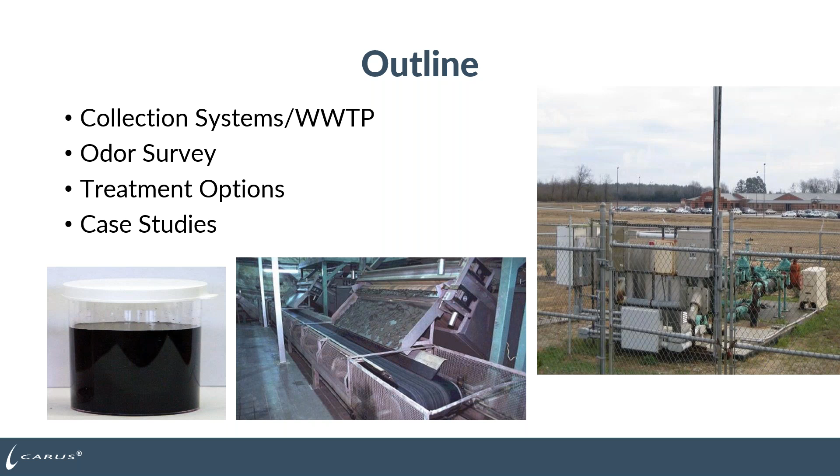So to go over a brief outline of what we're going to cover today, we're going to cover odor control with permanganate. We're going to start out in the collection systems where the wastewater starts, and then move in toward the plant itself, and then to the headworks, and then into the plant in solids dewatering. We'll talk about odor surveys. We'll talk about the many different treatment options that you might have, and then we'll have case studies for each of these different applications.

So one of the big things is, what is odor, right? How is it formed in your system, both out in the collection system, at the headworks at the plant, in the dewatering process itself? What are the reasons that you would treat for it? It could be as simple as meeting the OSHA regulation for hydrogen sulfide. It could be customer complaints or odor complaints from people near the plant or near that sanitary sewer. And then what are different things you can do in your treatment plant, but we'll focus on permanganate itself, specifically on how it can remove odor compounds like hydrogen sulfide and mercaptan.

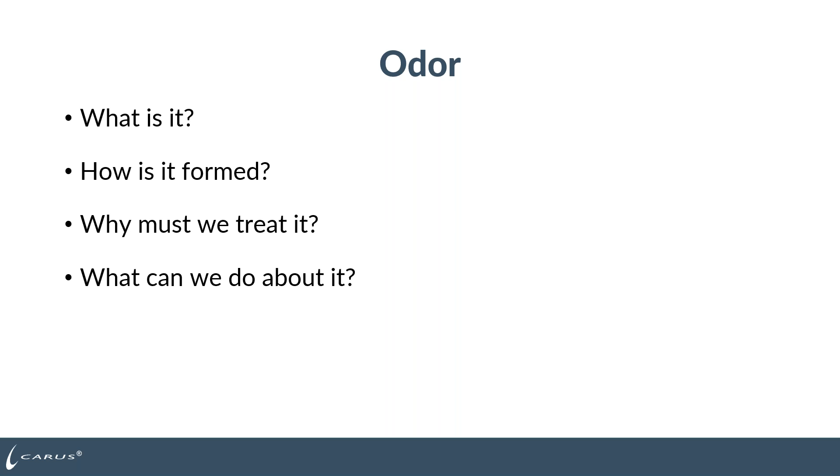So wastewater systems are very complex, lots and lots of different parts, lots of different pieces moving the wastewater from a person's home to your wastewater plant. So you can generate odor throughout that process. So out in the collection systems, you have pump stations / lift stations collecting wastewater before it pumps it downstream through a force main. You can have gravity sewer discharges where you can have odor complaints as well. So those are all places you're collecting the wastewater from homes or from businesses or from schools, and you have a chance to collect and concentrate the odor at those places.

It moves through the collection system, obviously downstream towards your wastewater treatment plant, and you have your headworks at the wastewater treatment plant where you do screening and grit removal where you might have some odor control issues. You then have your clarification processes, your sludge settling in your plant, and then typically, depending on the size of the plant, you might do dewatering with a belt press or a centrifuge to dewater to have biosolids that you're either going to go out and do land application with, or you're going to send to the landfill as waste.

Throughout this process, probably the biggest thing that most people associate with wastewater generally is nuisance odors. So both hydrogen sulfide and mercaptans can cause rotten egg odors or different types of odors out there in the system. And typically those are the things that people are going to notice. So they'll smell that rotten egg odor, they'll smell the funky mercaptan smell, and they'll call in to complain.

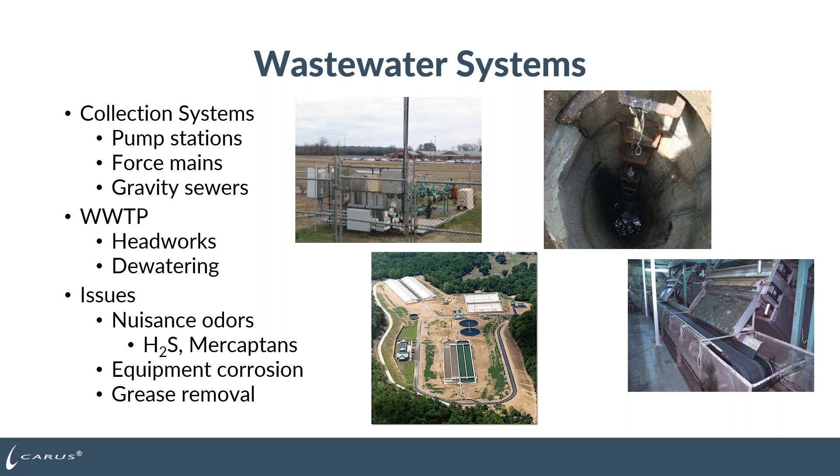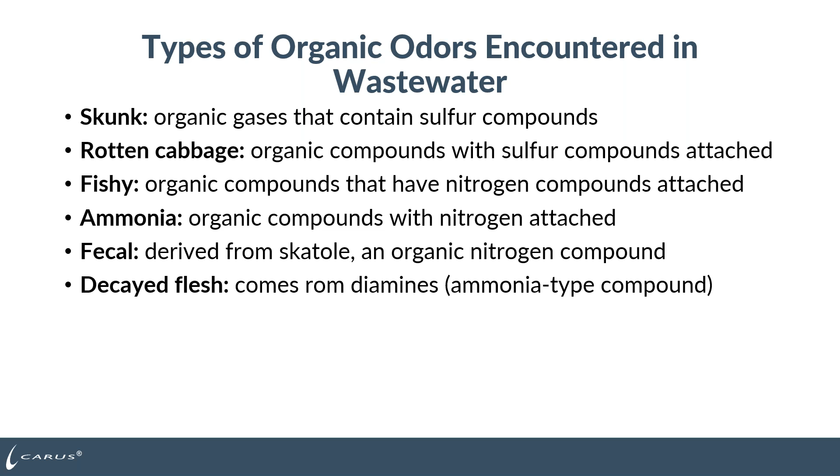Now, tons and tons of different odors in wastewater. Depends on what kind of compounds are going. Typically for municipal wastewater, it's usually hydrogen sulfide, rotten eggs, which we'll talk about. But if you have other kinds of discharges, so industrial discharges or food industry, just any kind of industry in general that can discharge other types of organics to the system, you might have some different odors. So you could have something like skunk, rotten cabbage, fishy. Depending on what's going on, you might have ammonia. You might have fecal, decayed flesh. So all different types of odor compounds are out there. But typically there's some that filter to the top.

A lot of the other compounds you hear, you'll do special testing. So maybe you have rotten egg, but maybe you have a different specific odor. So you can do some odor testing and determine, is it a mercaptan? Different mercaptans have very different smells. But there's a whole range of compounds you can have. So if it is a different odor that's not rotten egg, it could be a mercaptan or one of these other organic compounds. The big takeaway here is that odor threshold wise, all these compounds are well below part per million, in the part per billion level, where you can actually smell them.

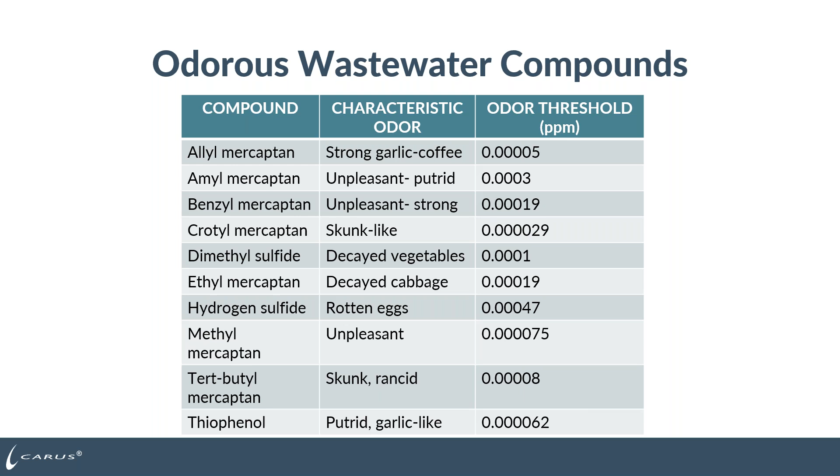So like I said, those are some of the weird odors with the mercaptans. Hydrogen sulfide is probably the biggest one. And then depending on what's going into the process, you might generate some ammonia at the treatment plant or out in the collection system. Along with those gases, you could have carbon monoxide or carbon dioxide, or in a processing or treatment plant where you're breaking down biosolids, you could generate some methane. So sometimes when you go by a wastewater plant, you'll see them flaring off the methane with a flare. You'll see the same thing sometimes at landfills, where they're generating methane gas from the breakdown of the products in a landfill, and they'll have the methane flare. And then the common other things we have in the atmosphere, oxygen, nitrogen, and hydrogen.

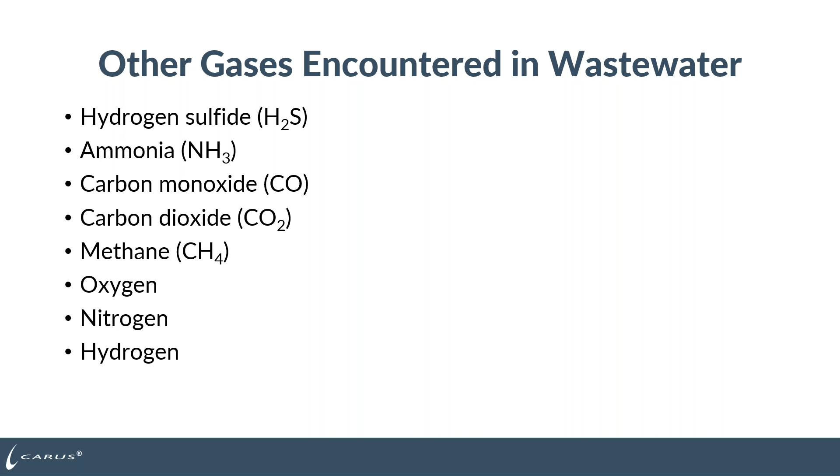The big one though, probably by far the most common at most places causing the odor complaints, is going to be hydrogen sulfide. It's a colorless gas, so you don't see it in air. It has a very distinctive rotten egg odor. The issue with the rotten egg odor is as you stay in an environment with hydrogen sulfide, it deadens your sense of smell. So initially when you walk into an area or start to smell the rotten egg odor, you'll be able to smell it directly. It'll be pretty repugnant at that point in time.

The longer you stay in that environment, it starts to deaden your sense of smell and you don't smell it anymore. So you think the odor has gone away when truly it hasn't. And that can be dangerous because you don't know that you're still in that environment. The other part as well is that hydrogen sulfide can get in your hair, on your clothes, on your equipment, and when you leave the area, as your sense of smell comes back, you'll notice the hydrogen sulfide as it comes off your clothes and your equipment.

So you'll notice that you're stinky when you leave the site as your sense of smell comes back. Hydrogen sulfide is also water soluble. So a portion will be soluble in the water, and then the portion that strips out will become atmospheric hydrogen sulfide. It's extremely toxic. You're going to see the OSHA chart for it here in a slide for how dangerous it can be in the environment. It's one of the things that you would measure for confined space entry as well.

And then on top of that, at different levels, it can be corrosive. So it mixes with atmosphere and moisture to form sulfuric acid, which can corrode metal, concrete, just all sorts of equipment. You'll see some pictures of that as well. And then depending on the concentration, if it gets high enough, it can actually get into the explosive range.

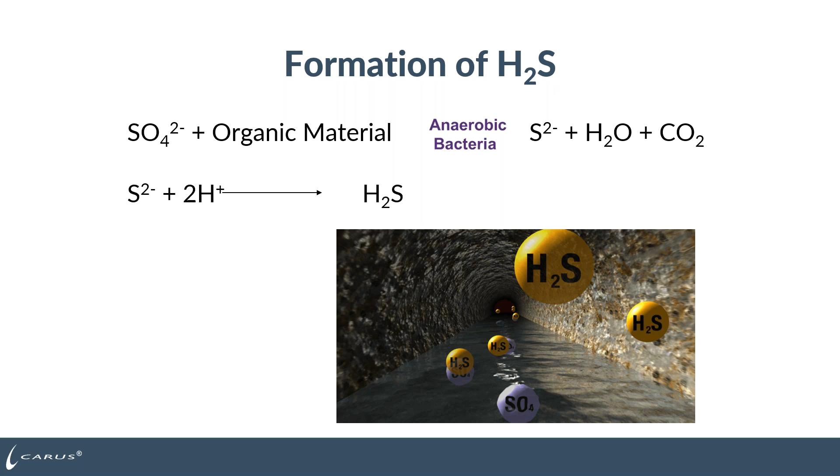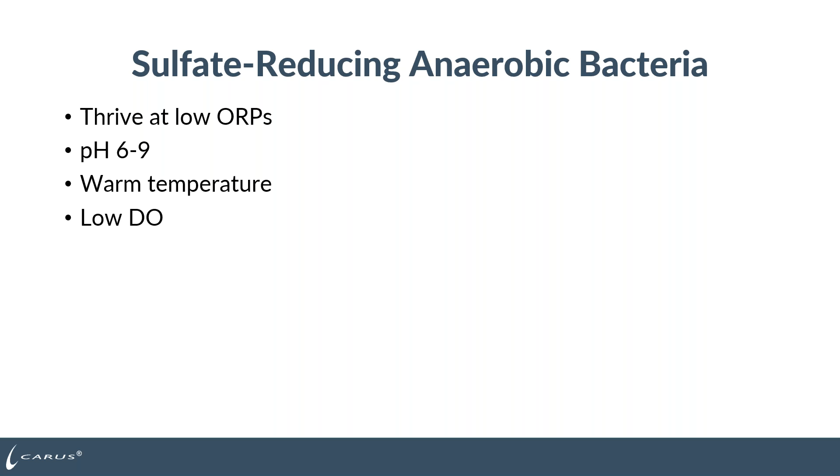Everything's there for those sulfate-reducing anaerobic bacteria out in your collection system and then into your plant. They thrive at low oxidation reduction potentials. Most wastewater is pH 6 to 9, so they've got a perfect environment. Wastewater is typically warmer than the outside atmosphere here in the cold north, although now we're warming up, so temperature is always going to be warm. And then if there's no dissolved oxygen, the anaerobic bacteria predominate in that case and will generate a lot of hydrogen sulfide.

So what does that look like out in the collection system? In this case, you've got a gravity sewer here. So you've got the pipe wall, you've got some bacteria growing a slime layer on the inside of the pipe itself. You've got the wastewater passing through the pipe. If there is sufficient oxygen, so you have a high dissolved oxygen level in the wastewater, greater than 1 milligram per liter, typically then you won't have much dissolved sulfide in the wastewater. The bacteria that are going to predominate are going to be aerobic, they're going to chew up the oxygen, and they're not going to generate anything else.

What ends up happening, though, is as that dissolved oxygen level drops, because as the bacteria pull the dissolved oxygen out of the wastewater, those bacteria are going to start to look for oxygen in other sources. So once they run out of dissolved oxygen, they're going to start chewing up on the sulfate that's in the wastewater itself. Sulfate's always in excess out there in the wastewater, so they'll chew the oxygen off of it, and they'll generate dissolved sulfide into solution. So now you start to increase the level of dissolved sulfide in the wastewater itself. And then as that sulfide level builds, it's in equilibrium in the water itself and the atmosphere above it. So some of it's going to start to slowly come out of solution.

Now, there are ways to pick that up. If you shake it or cause turbulence with that wastewater, so it falls into a pit, you're pumping it, so you're aerating it somehow, you're going to strip more of that dissolved sulfide out of solution and force it into the atmosphere. Once it gets into the atmosphere, it can mix with moisture to form sulfuric acid. And as that sulfide forms sulfuric acid, it corrodes everything it comes in contact with, so metal, concrete. It hits the pipe wall, goes down the pipe wall, back into solution, and now you end up back at sulfate again, and then the cycle starts over and just kind of keeps repeating itself time and time again.

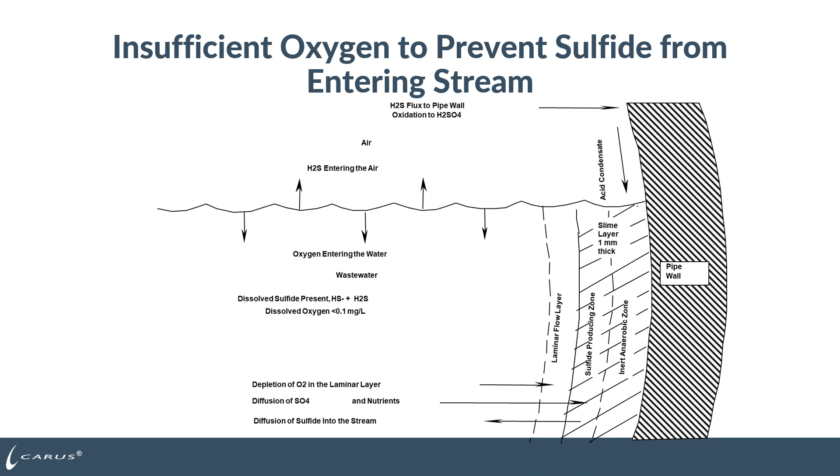So you can trap it, but you're not treating to remove it. It's still there. It can come back out of solution as the pH drops. So generally, if you do something like lime or magnesium hydroxide, that can keep the pH up for a while, but as it combines with more wastewater at different lift stations and different junction points, and the pH drops back down, that hydrogen sulfide is going to come back out of solution. So you're not, in that case, treating to remove, you're treating to kind of trap it in solution.

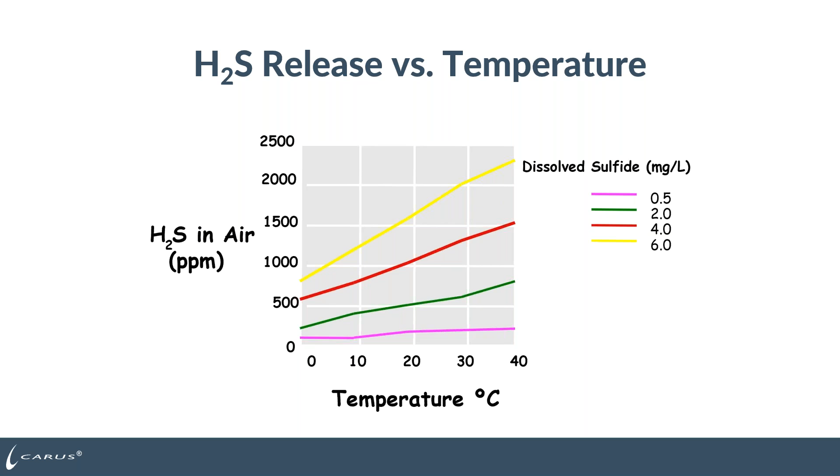So one of the ways to remove hydrogen sulfide: you have the dissolved sulfide in solution, permanganate is going to oxidize it, and it's going to oxidize it very, very rapidly in wastewater, whether it's at an acidic pH, so below 7, neutral pH at 7, or a basic pH where we're slightly higher up in the 8s and 9s. The one thing you'll notice is as the pH increases, the amount of permanganate that you need does increase. Generally in wastewater, we're right around that pH 6 to 7 to 8. So we'll be right there toward the neutral level, where it's about 4 parts of permanganate that you need for 1 part of hydrogen sulfide.

One of the benefits of permanganate is its reaction rate. So permanganate is going to react with hydrogen sulfide pretty much instantaneously. So you add it to the wastewater. A lot of times we can do jar testing with it. Measure dissolved sulfide, add permanganate, stir for 30 seconds, measure dissolved sulfide, and show that all the dissolved sulfide is gone.

You can also use another oxidizer like hydrogen peroxide. Hydrogen peroxide typically does need some reaction time, so you might need 20 minutes, 30 minutes in order for the peroxide, which is packaged oxygen, to react and remove the hydrogen sulfide. In the case of iron salts, you're not an oxidizer, you're a precipitation reaction. So you add iron salts to precipitate out iron sulfide. It just depends on how you get contact and get that precipitate to form. But typically, if you're using iron salts, it's going to take slightly longer, up around the 40 to 50 minute mark for that sulfide to drop if you're doing jar testing or applications out in the field.

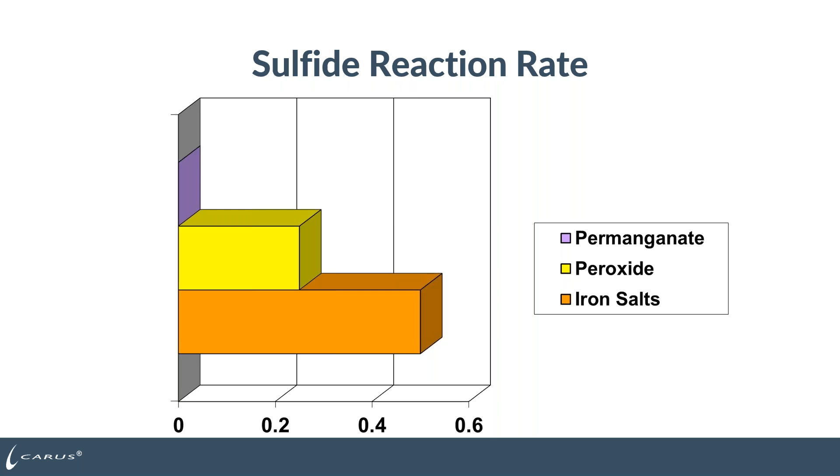Oxidation versus precipitation for mercaptan destruction. So if it's not just hydrogen sulfide, if it's one of those other compounds of mercaptans, there's multiple ways you can treat. Once again, in this case, this was mercaptan concentration up around 35 milligrams per liter or parts per million. Iron salts, because there's an organic molecule attached to the sulfide, you can't really get a great precipitation reaction like you can with dissolved sulfide. So in this case, they were feeding 1,500 parts of iron salts, and they were only getting about a 10 part per million reduction in the mercaptan concentration.

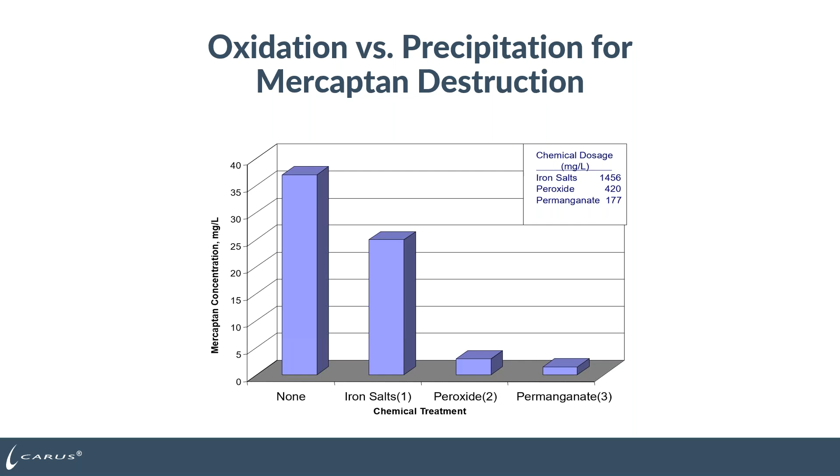Peroxide will work. It will break down the mercaptan odors. They were using 420 parts of peroxide. You can see you go down from 35 down to less than 5, down to about 2. Permanganate, much lower dose, 177 parts. And we can get it down almost to less than 1 or to 0. So we get that reaction rate pretty quickly and much more oxidation of the mercaptan itself at a lower dosage than the peroxide itself. So there's a little bit of the chemistry.

So what are you going to do if you do have odor complaints in your system? So the first thing is to do a wastewater odor survey. So systematically collect information about your wastewater system. And that can be where you're going to treat at. So how many odor complaints do you have in that area? How often or how frequent are those odor complaints? What's the flow rate of the wastewater that's there? What type of odor complaints do you have? Is it just the typical, hey, it smells like wastewater, rotten eggs?

Do some monitoring as well. So what are the levels of complaints that you're getting? So obviously, hey, maybe we get a half dozen complaints from people in the area. So we go out and do some monitoring. And then the question is, what are the levels out there as well? Take that data that you've collected, organize, analyze the results to see where it's going to make the most sense for you to treat out there in your system.

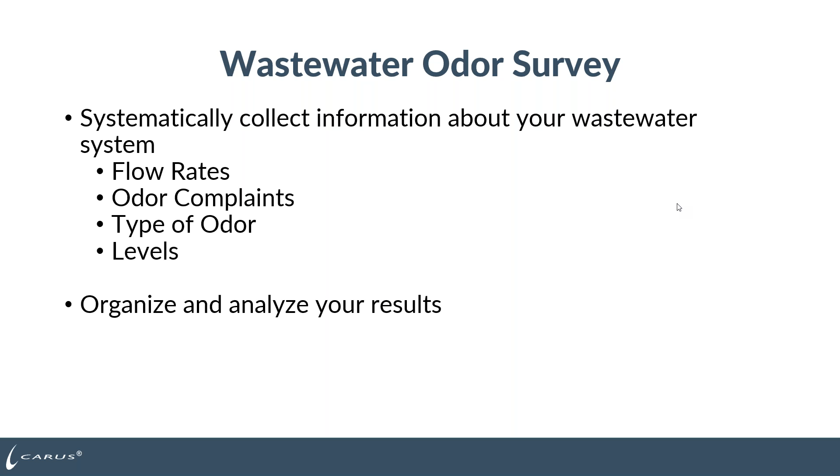And then more common nowadays in the last 10, 15, 20 years is to put an OdaLog or an Acrulog or some type of sensor out there and collect hydrogen sulfide data over a long period of time, typically at least a day, but maybe a week to 2 weeks, and then swap those monitors out because you can generate all that data to see when are you having the odor complaints, what's causing, or when does the odor spike out there in the system itself.

The other part that you want to do out in the collection system, besides the OdaLog, is have a little bit of an overview. Okay, we're getting complaints in this neighborhood. So what's the wastewater that feeds that neighborhood or where that odor complaint is coming from? So obviously you can go back to your system drawings or you can kind of sketch it out on a piece of paper. So is it wastewater being collected from houses and collecting at a lift station, and that first lift station doesn't have any odor complaints, but when we pump from that lift station downstream to a force main discharge point, we're getting some odor complaints from the turbulence when it discharges.

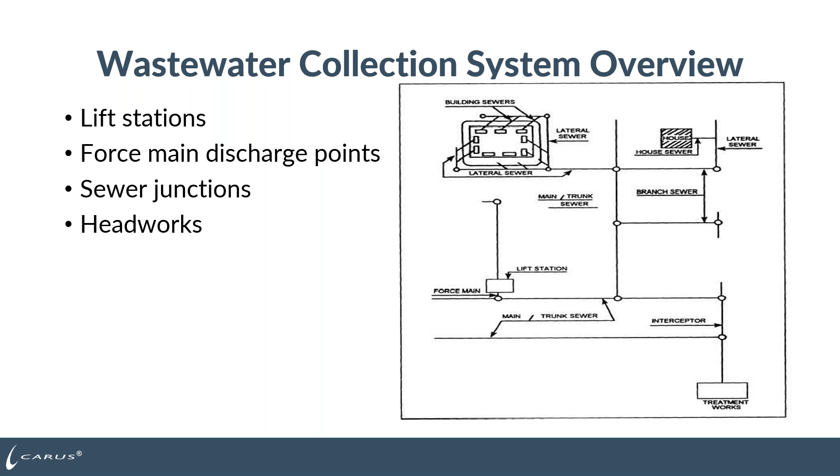Or it's a sewer junction where multiple lines are coming in, and you do testing and 2 of the lines coming into a junction have no odor complaints, but 1 of them does have a lot of odor complaints. So then somewhere upstream maybe you're going to treat for that. And then at the headworks of the plant, maybe it's making it all the way to the plant and you're getting some complaints at the headworks of the plant itself. But collect that data, kind of backtrack to see, okay, what's feeding this? What could be the optimal way to treat for it?

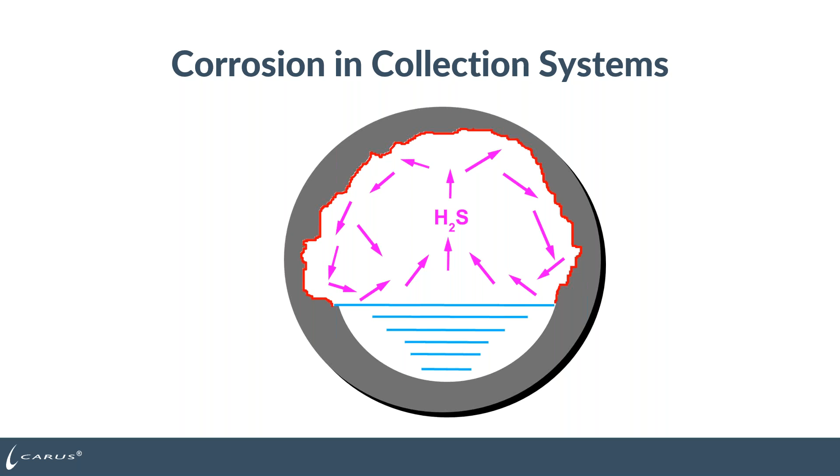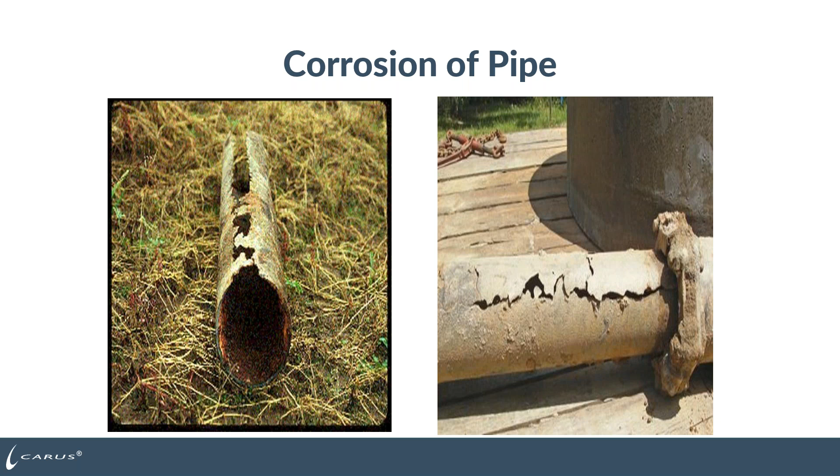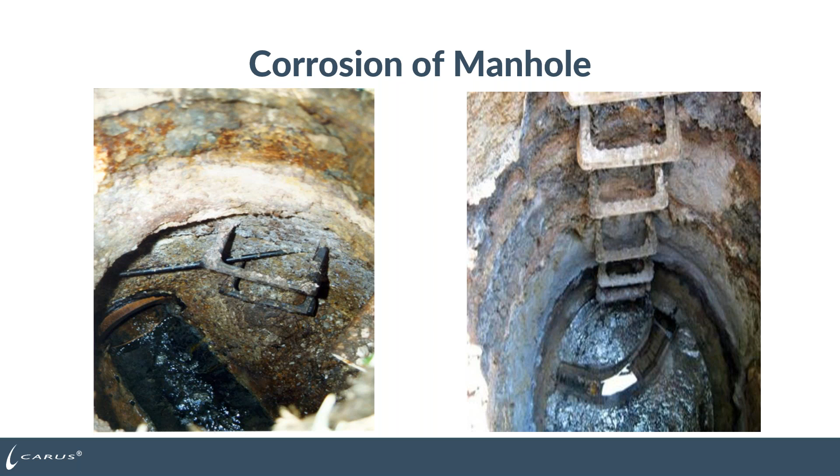A couple times in my career of 26 years, we've opened manhole covers and went to grab those rungs and they've pulled directly out of the wall. So that can show you how bad the concrete's impacted in that case.

So what can you do? Obviously, prevention rather than chemical treatment is the best way to go. If you can move the wastewater from the collection system through all those pipes and lift stations to the wastewater plant as quickly as possible with adequate flow velocities, you won't generate hydrogen sulfide. Wastewater that's brand new and fresh at a person's home typically isn't very stinky. It just takes time and collection in the wastewater system to chew up that dissolved oxygen and then start chewing on the sulfate to generate it. So try to minimize the detention time.

Now that's not always possible. A lot of times the collection system is built for future growth. So the piping and the lift stations are built for, hey, we're gonna have 100 homes in this area, but when we first do the construction, there's only 20 homes. So everything's a little oversized. Wastewater sits much longer than it's supposed to. Now they can change pumping rates, they can change levels in the lift stations to try to move that wastewater or pump it a little more frequently. But still, even at that point, the wastewater is going to sit longer.

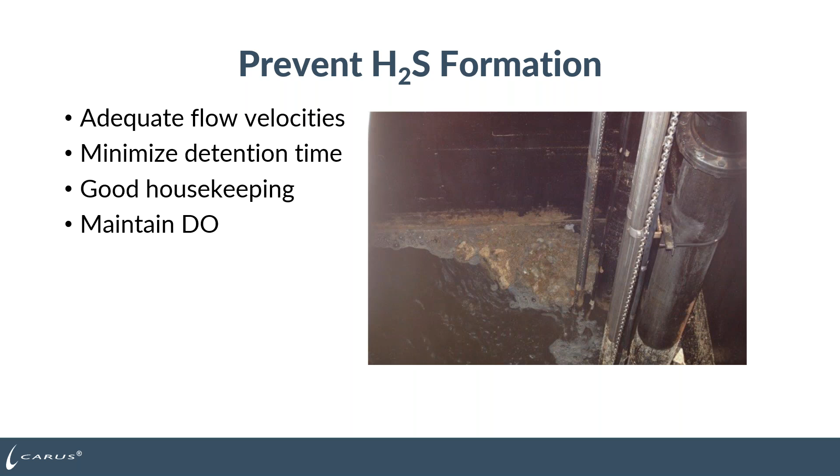So if you've got a lot of grease issues, two things: make sure that you clean the grease out of those wet wells, whether you have a vacuum truck or other ways to remove the grease. And then the other thing is a good pre-treatment program upstream. So tell homeowners, you're not supposed to dump grease down the drain. Have a good pre-treatment program as well for grease removal and grease traps at restaurants, so they have a way to remove grease rather than discharging it to your system. Just good housekeeping on the front end to prevent putting that stuff into the system. But move that wastewater as quickly as possible to the wastewater plant so it doesn't sit and doesn't generate odor complaints.

Some things will work, but they're not the first choice. You could use something like CAIROX nuggets where you just have an occasional odor complaint. You throw some nuggets in a lift station wet well, they dissolve as they sink and you get some treatment. But it's not a long-term treatment, it's kind of a spot treatment.

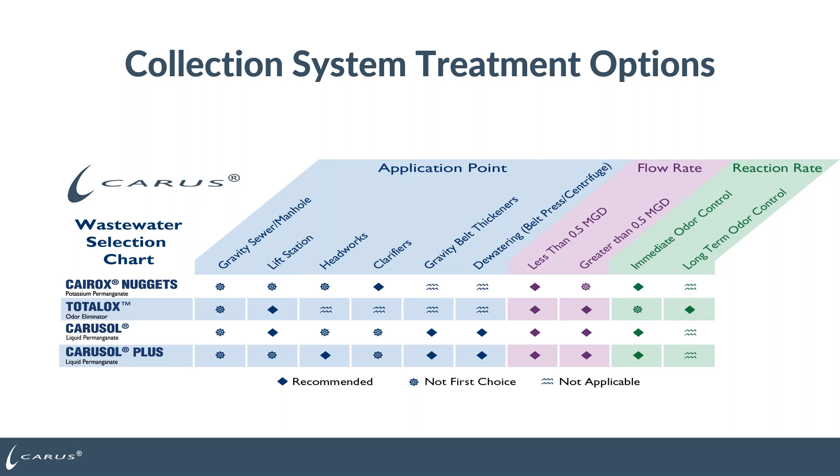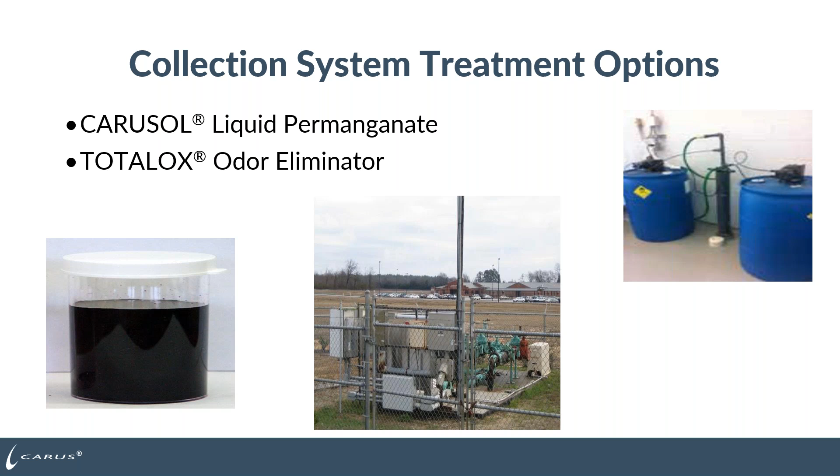In the plant, typically you're going to use things like CARUSOL as well, because you're doing continuous treatment. Out in the collection system, you really have two kind of options: CARUSOL liquid permanganate, and Totalox odor eliminator. So we'll talk about each of those.

CARUSOL is a liquid permanganate, concentrated. You can buy CARUSOL, which is 20% active, or CARUSOL C, which is 40% active. Both of those are packaged from as small as a 5-gallon jerry can to a 55-gallon drum to a 275-gallon IBC. You can buy CARUSOL or CARUSOL C, and you can feed that product directly from the container itself.

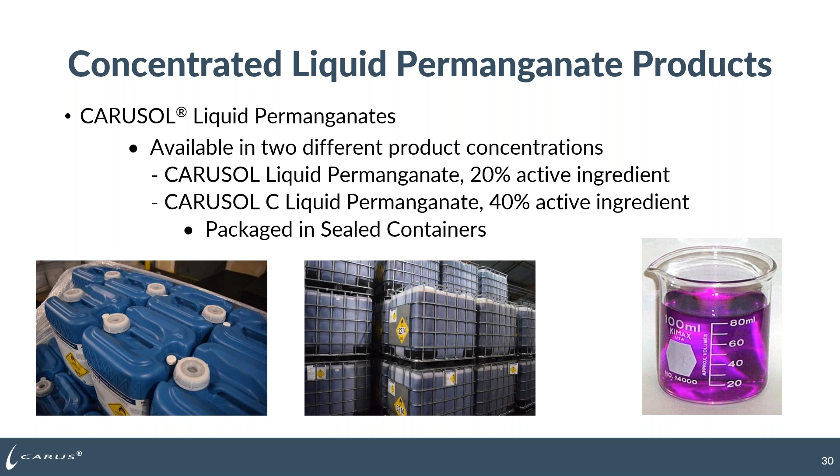Totalox odor eliminator is a specialty blend, 1% permanganate, so it does have the distinctive purple color, and it's 40% calcium nitrate. Permanganate gives you the instant oxidation of hydrogen sulfide or mercaptan compounds, and then the calcium nitrate gives you long-term odor control downstream from the application point.

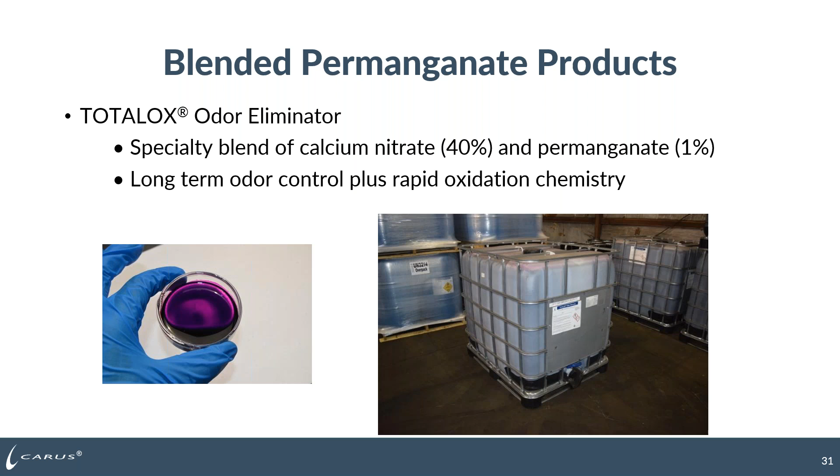So our first case study here, a lift station in a municipality, 1.2 million gallons a day flow rate. They were getting odor complaints from neighbors in the neighborhood and from a nearby soccer park that had been built next to the lift station. Generally lift stations don't look this nice, but this was built right next to a brand new nice soccer park with multiple soccer fields for kids to play at.

So they wanted the lift station to also look nice, obviously a nice brick building there. They were having occasional grease issues in the wet well, so there's that picture again with grease. And I don't know why, but it's always attracted to the floats in the corner of the lift station itself.

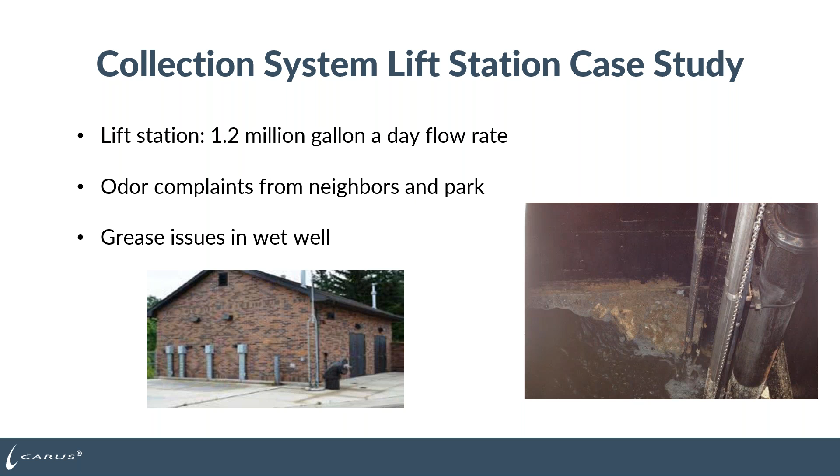So they were getting odor complaints from people at the soccer park. The prevailing wind occasionally would be directly toward the soccer park, so when people were there watching their kids, they would get complaints.

A data logger was suspended in the wet well at the lift station to collect baseline hydrogen sulfide data. You can see there's the OdaLog getting hung by a rope down into the wet well itself. Average in the wet well was about 14 parts per million, and there was an occasional peak of about 80 parts per million.

In this case, they know they wanted to treat all the odor complaints centered around this lift station. So we want to do immediate odor control and treat the wastewater right at this lift station. Now, as they drew out from this lift station, there was no upstream lift station where we could treat at. Everything feeding into this lift station was from homeowners, standard wastewater from homeowners, and this was collecting all the wastewater from homes.

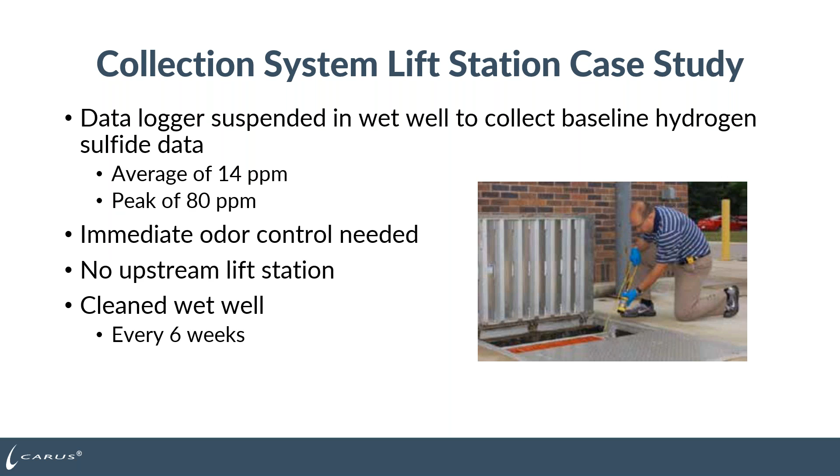So no industrial wastewater, all just wastewater from consumers' homes. And just based on how long it was sitting at the lift station, it was generating odor complaints. They were also, because of the grease, having to go every 6 weeks to break that grease up and scoop it out of the wet well to remove it so they didn't have issues with the floats at the corner of that lift station.

So what they decided was we need immediate odor control, so we're going to go with straight permanganate. They used CARUSOL liquid permanganate, and the trial setup was 2 drums with 2 metering pumps.

So the feed system decided, when we were looking at that hydrogen sulfide data from the odor logger, you could see that there was kind of an average amount of hydrogen sulfide and then occasional peaks. In the morning when people started to use water, the lift station would fill, and that would cause some pumping of the lift station, causing an odor complaint. Then when people got home at the end of the day, between 3 and 5 o'clock, they might be cooking, doing stuff, and there'd be another influx of wastewater coming to the lift station that would generate a little higher peak as stuff stripped out.

So they put those 2 pumps on timers. One was kind of feeding all the time in the background, and then the other one would feed only during those times where they would see the increase in flow rates.

So when the flow rate would pick up in the morning and pick up at the end of the day, the other pump would turn on and start feeding an additional dosage. So with the treatment going into the wet well itself, so we treated just before the wastewater would enter the wet well at the lift station, we were able to knock the average hydrogen sulfide with an OdaLog down to 0 ppm in the headspace.

And then there'd be occasional peaks of about 10 parts per million of hydrogen sulfide. So there were still some peaks, but much, much lower than the 80 parts per million, no kind of background hydrogen sulfide. And that basically eliminated the odor complaints from the neighbors next to the lift station and people at the soccer park nearby.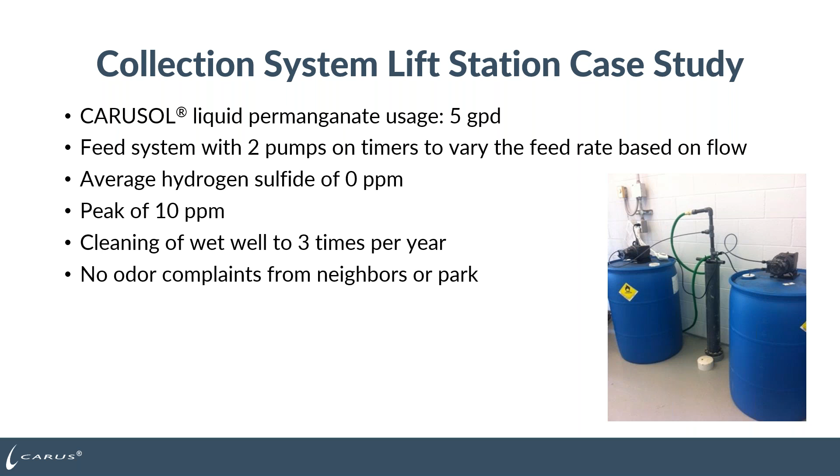But not completely eliminate it from the wet well itself. So they still did some cleaning a couple times a year, but much, much less than they had done before. So there's a case where it was immediate odor control, so we need concentrated permanganate.

The next we'll talk about here is TOTALOX Odor Eliminator. So this has a little bit of permanganate for oxidation, but the primary use is nitrate salts for sulfate reduction. So to prevent the bacteria from chewing on the sulfate, they'll chew on the oxygen off of the nitrate compound. So those bacteria out in the collection system really want dissolved oxygen. If they don't have dissolved oxygen, they'll chew on the nitrate. If they run out of nitrate, they'll start chewing on the sulfate. So you're just giving them an alternate food source.

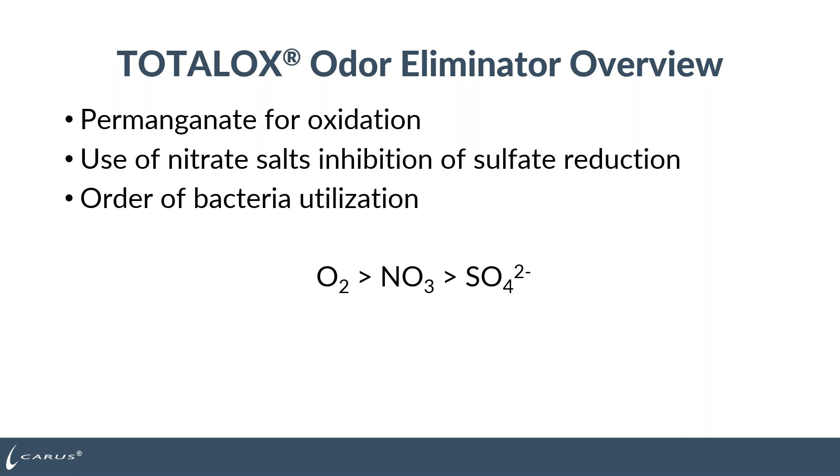The general rule of thumb in this case is you need 2 to 4 gallons of the permanganate nitrate blend per pound of dissolved sulfide to remove. Now, typically the treatment goal is 0 milligrams per liter of dissolved sulfide in the effluent. So where you're having your odor complaint, you'd like the dissolved sulfide to be at 0, so you're not having anything that can strip out.

And then if you are trying to maintain nitrate residual through maybe 1 or 2 or 3 lift stations, you might want to see some nitrate residual. So if you're feeding at 1 lift station and you've got to go through 2 lift stations where you have odor complaints, your first lift station, you'll probably have some nitrate residual and no dissolved sulfide. And then your final one, where you're still getting odor complaints, you'll want to have very little dissolved nitrate and no dissolved sulfide at that point.

So it's just a matter. You can feed it at multiple lift stations if you want to, but sometimes it's easier setup-wise to feed it at 1 and carry it through a couple lift stations. Or if it's a force main, you feed it at the front of the force main and you want to make sure that you don't have any dissolved sulfide at the discharge.

Now, as temperatures warm up, you typically might have a slightly higher dosage, bacteria are more active. The other one that's really the biggest one is longer detention time. So the longer that wastewater sits at the wet well, the longer it takes for that wastewater to travel through the force main to its discharge point, that bacteria is going to have longer to be looking for a food source. So in that case, longer detention times typically require higher dosages.

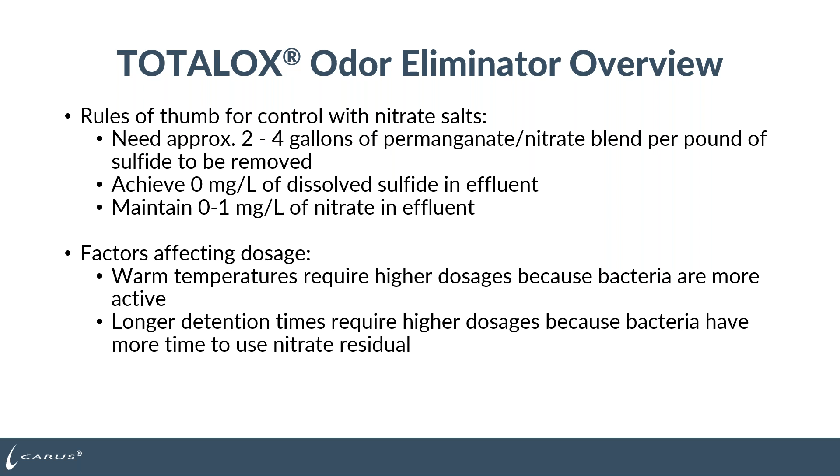So this collection system lift station was in a very large southern city, and they were completing a rehab project on a 54-inch gravity sewer line that was along the river.

Now, that rehab project, because they were bypassing, they went through a brand new nearby retail district. So it went by a museum and all the shops and outdoor dining in the downtown area. So what they found is while they were doing this rehab project and bypassing the wastewater, they were getting a lot of odor complaints as the wastewater moved to that area.

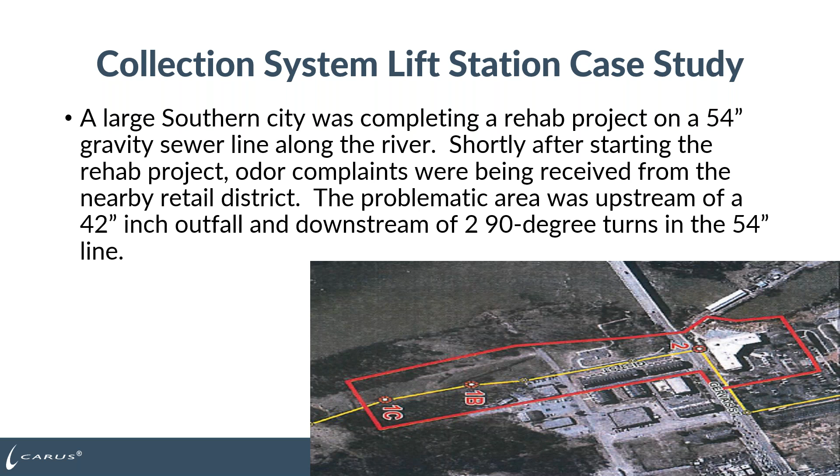What they found was there was a 42-inch outfall and some downstream 90-degree turns in the 54-inch line, and that was causing enough turbulence to strip sulfide out of solution and causing some odor complaints. So the city itself with an engineering firm had done some odor complaint profiling. They had OdaLoggers installed in 4 manholes along the line.

Peak hydrogen sulfide levels you can see here in the chart, for the 4 different manholes that they did monitoring at. Average hydrogen sulfide: 3 parts, 5 parts, 5 parts. The real bad one was at 16 parts average. And then some peaks in the hundreds.

So you're getting peaks, and the peak is what's kind of forcing the sulfide out of the manhole cover to the atmosphere, because there is a little bit of venting in a manhole. And so they were getting odor complaints from that. So the city was looking at a quick solution for the problem.

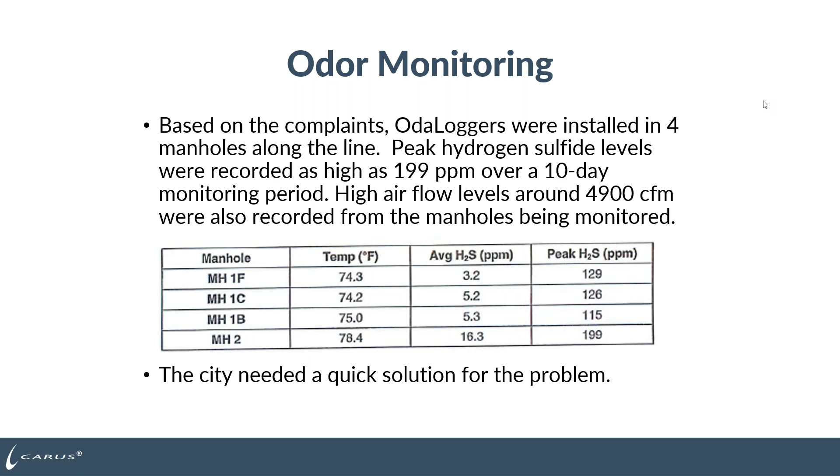The one thing they did know is if you seal the manhole covers, that's just trapping the hydrogen sulfide below the cover, and you're going to start destroying all that infrastructure from the hydrogen sulfide below the manhole cover. So what they were looking for was a quick solution for the problem. They really wanted to eliminate those odor complaints in that retail district.

So they decided, obviously we're doing a rehab project. It's possibly going to be 1 to 2 years. While we're doing this rerouting, we have an issue, so we want a temporary setup. So at the lift station upstream of all those manholes, they had plenty of space to put in a temporary bulk tank. So they brought in a Baker tank and set it up in portable containment.

And then they had metering pumps in a Rubbermaid hut tied together. They had 2 pumps, so they had redundancy. They could feed with one, and the other one's a backup. And they would switch every week back and forth between one pump or the other. Both pumps could do as much as they needed, but it gave them the confidence that we always have a backup pump if something happens to one pump.

The other part was they had remote telemetry on the tank as well, so they could tell what the level was in the tank. So that was a way for them to verify the pumps were pumping what they wanted them to. And that was also the way that they could determine, along with us at Carus, hey, it's time for a reorder.

So the tank could hold more than a full tanker truck, which is 4,000 gallons. So as they got low, they could say, hey, it's time for us to place an order based on the tank level, get the order in, and then refill, and then look at that monitoring remotely.

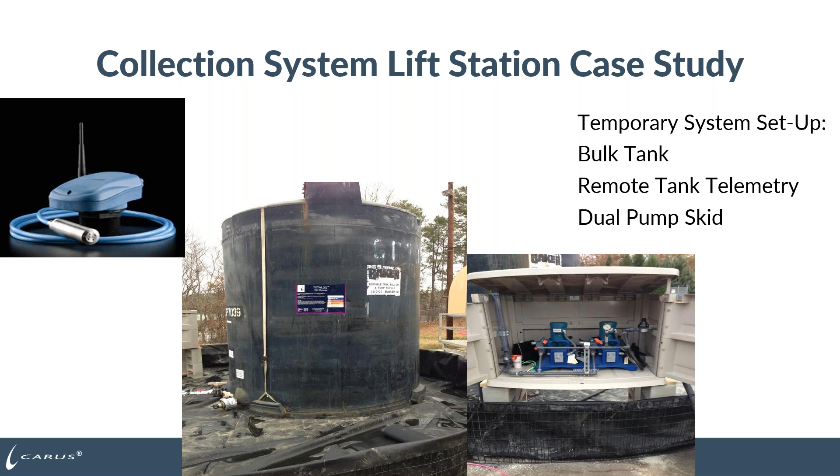So monitoring before we started feeding at the lift station itself, the hydrogen sulfide at the two worst, we got about an average of 14 instead of the 16, and then an average of 6 instead of the 5, but we were seeing the same data they were, and the peaks were about the same too: 150, 190, 200.

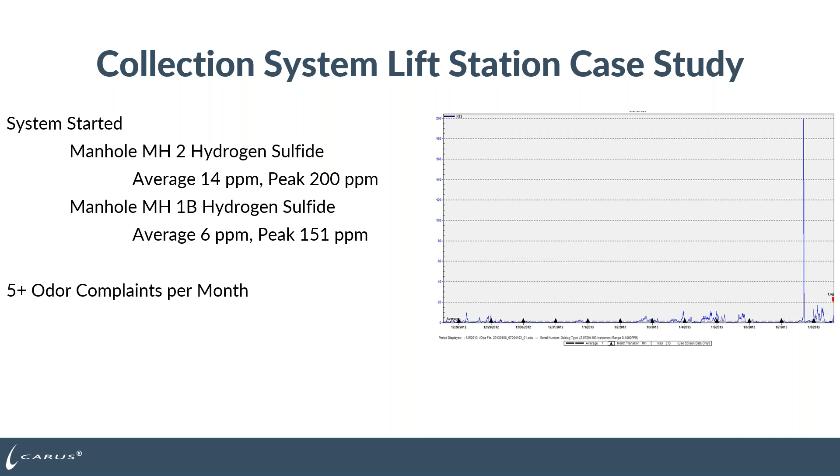So the initial month that we started up the system, they were getting about 5+ odor complaints per month from people in the downtown retail district and from the museum downtown. So the system was set up. We initially started feeding at 100 gallons per day to the wastewater flow itself.

Average hydrogen sulfide dropped down to 1 part per million at both manholes, and the peaks well below 200. Now we're at 25 and 5, so much, much lower levels. The first month that the system was started up, we had 1 odor complaint, down from the 5 they had the month before. So a significant decrease, but still an odor complaint.

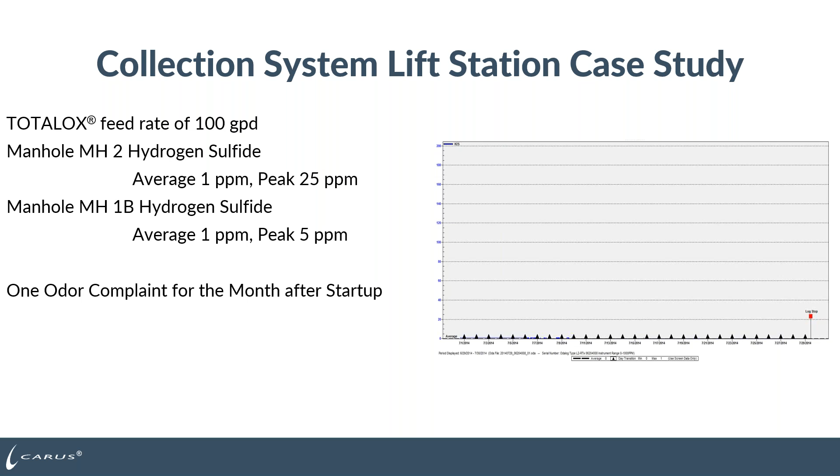So what they decided was, with the city council and the wastewater plant people, we really would like no complaints. So yeah, it went from 5 to 1, but we still had 1. We'd like to kind of drive it to 0 complaints. So increase the feed rate going into the wastewater from 100 gallons per day to 125 gallons per day. And the average hydrogen sulfide dropped to 0. And the peaks were only 1 part per million. So that drove all the odor complaints away.

The rehab project took about the full 2 years for them to do. So they had thought between 1 and 2 years, and it actually took a full 2 years. During those next 24 months, they only had 2 more additional odor complaints in those 2 years. So knocked them down completely, almost completely gone.

At the end of this, the rehab project was done. They were able to reroute the sewer back the way they wanted to. And with the rerouted sewer, they didn't have odor complaints. So this was just a temporary setup for the rehab project. And then once that was done, as wastewater moved in its normal flow pattern through the area, they got rid of those complaints completely.

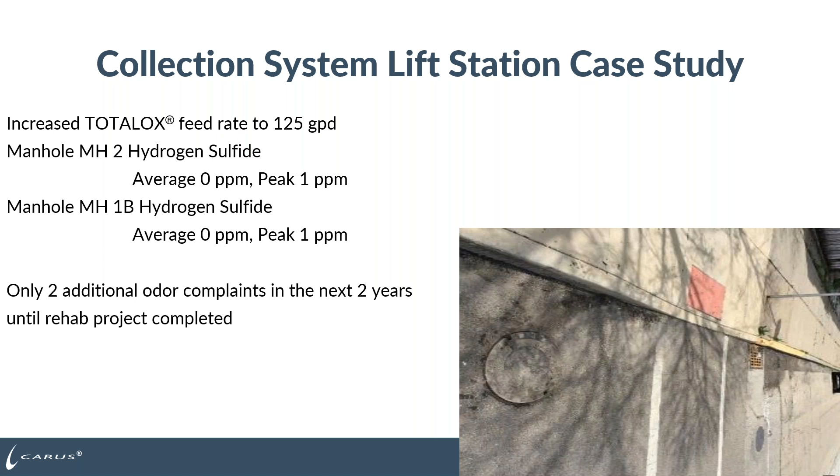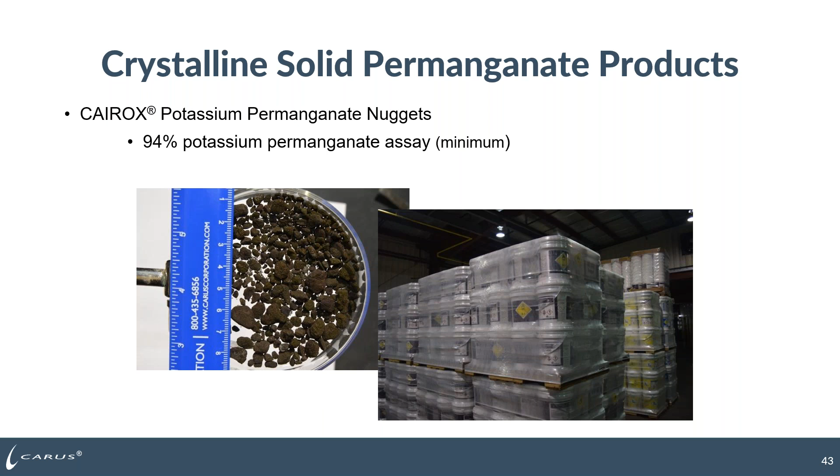So other options for permanganate, in this case, would be solid permanganate. These would be nuggets. So you'd use these out in the collection system. You use these kind of for spot odor control. So you can see a picture there. They're kind of chunky permanganate chunks available in pails. And where you would use these, you have a manhole that has some issues with odor complaints, or a lift station wet well that has complaints, but generally you don't have complaints all the time.

You'd go out and you'd scoop out some of those nuggets out of the bucket and throw them or broadcast them into the lift station wet well. They're going to sink, react, and destroy the hydrogen sulfide at that application point. The other time we see these out in the collection system is if you have a wastewater lagoon that has gone septic or has some odor issues and generally doesn't.

You can go out and treat with the nuggets, broadcast them from the shoreline, so throw them out into the lagoon, or sometimes we've seen people go out on a boat and just broadcast them by hand across it. They're really just a spot check for odor. You don't have normal odor complaints, you've gotten some, so you want to do something, you can throw the nuggets out. Very, very low tech. You're broadcasting them for the odor control. The nugget's large enough that as it sinks, it reacts and removes the hydrogen sulfide.

You do want to be careful if it's windy conditions. They can be dusty, so you'll want to make sure you're wearing a little N95 dust mask if it's a windy day, or if you can avoid the windy day, feed them on a day where it's not windy, so when you're broadcasting, you don't generate that. Sometimes with lagoons, it's always windy, so they might switch and make a liquid permanganate solution or use CARUSOL directly and go and spray that on the surface of the lagoon and do the treatment that way. So very, very low tech with the nuggets.

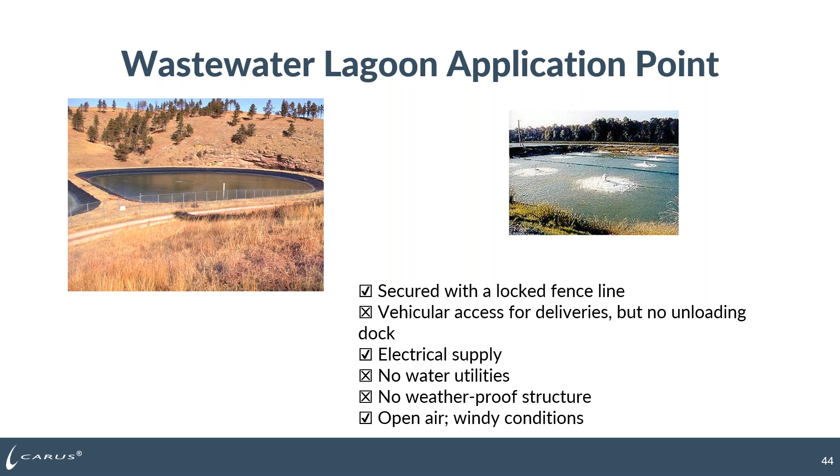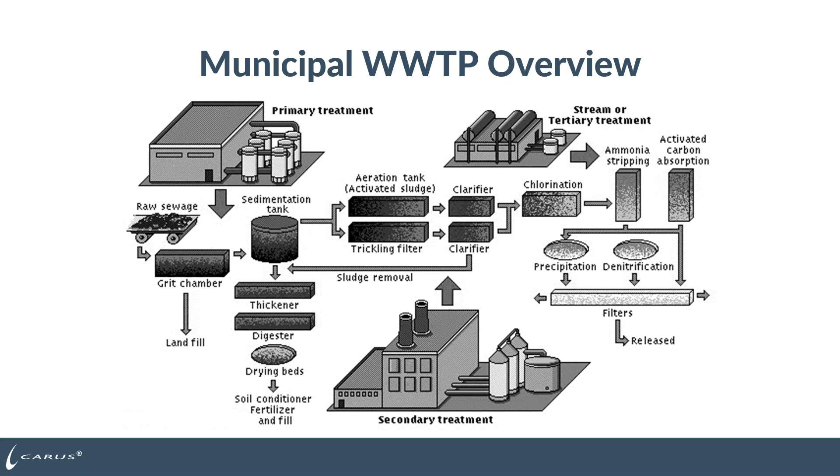So at the municipal wastewater plant, so we're out in the collection system, we do have the options for CARUSOL, we have the options for TOTALOX. You move into the treatment plant and do odor control. So you've got the headworks, you've got sedimentation tanks, you've got clarifiers, you've got sludge dewatering. So lots of different places where you can have odor complaints where you might want to treat.

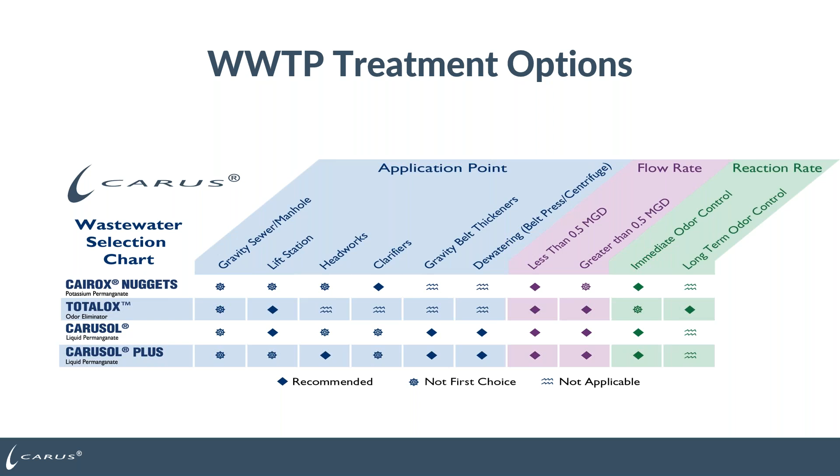Come back to our selection chart, you'll see that at the headworks, it could be CARUSOL, CARUSOL Plus, or gravity belt thickeners, dewatering. It could be those products too as well. So CARUSOL and CARUSOL Plus are both liquid permanganates. CARUSOL Plus is a combination product. And then you also could use CAIROX nuggets if it's just a small application, like in a clarifier that's gone septic at your plant.

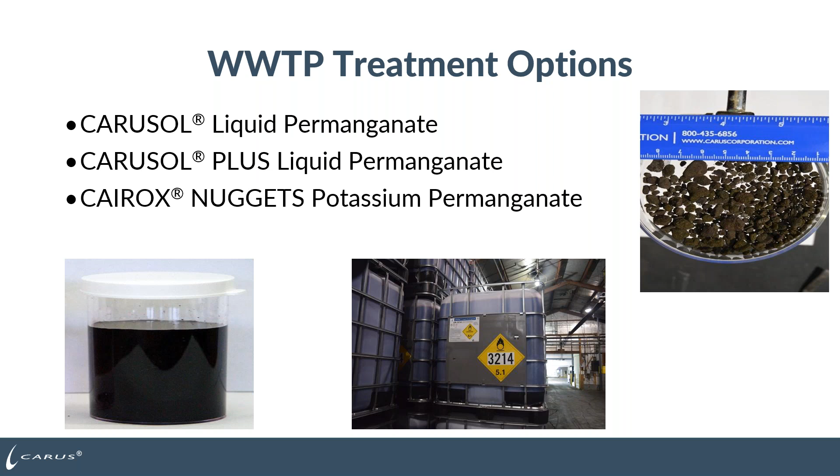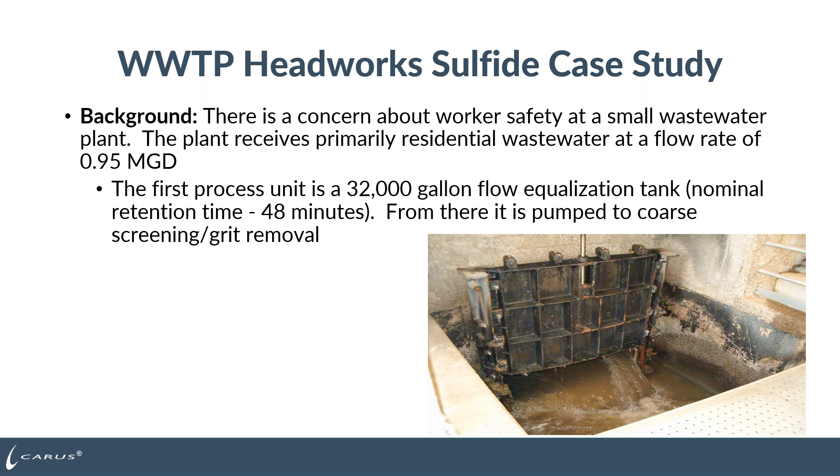So plant staff would have to come in and they would work on the screens and clean the screens and the grit for the grit removal. And they would have hydrogen sulfide levels in the room of about 40 to 100 ppm, so way above the 10 part per million level. So what they would do when they would go into the room is they would open the door to kind of ventilate it. And they had a ventilation fan too.

They would turn that on as well. And so what that would do is, as the sulfide had built up in the room, it would vent it to the atmosphere, which would then cause complaints in the neighborhood. But then it allowed the level of hydrogen sulfide to drop lower in the room, so it was safe for the workers to be there. But you're also now causing the odor complaint in the neighborhood as well.

So the manager at the plant says, hey, can we do something to treat at this point? I'd love to be below 10 parts per million without having to turn the ventilation fan on, right? So I'm not venting anything to the atmosphere to cause odor complaints in the neighborhood. And ideally, could I get less than 5 parts per million in the room without turning the ventilation fan on?

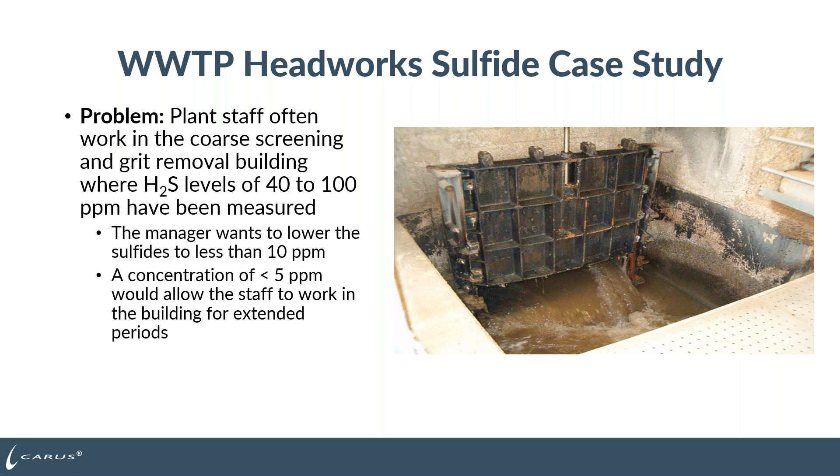So they chose CARUSOL liquid permanganate into the collected wastewater. Initial dose very, very high. Typically in collected wastewater, we're usually down around 10, 25, maybe as high as 50. But because the sulfide level was so high and there was that basin, we wanted to knock that wastewater odor out of that equalization basin very quickly. So the dosage started at 100.

After 2 hours, sulfide in the room dropped from 20 to 25 on the day we were there to less than 5. So then the permanganate dosage was cut in half. We cranked it back after we turned over that equalization tank, and sulfides dropped in the room down to less than 2 to 3 ppm. So we're below his 5 ppm goal.

And then that same day, we were able to turn the dosage all the way down to a more normal dosage of 25 milligrams per liter for the wastewater coming in, and maintain that average of 2 to 3 parts per million in the room itself without the ventilation fan running. So we slug dosed it to get everything knocked down, and then eventually got to a maintenance dosage of 25 milligrams per liter to keep the hydrogen sulfide below 5.

So the workers could be in there as far as the OSHA standard. They didn't have to turn the ventilation fans on to generate the odor complaints in the neighborhood either. So we fixed both issues with one product.

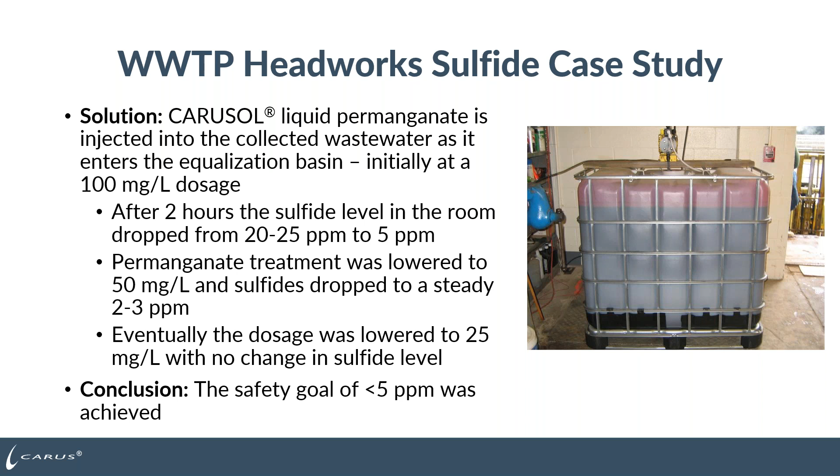Our last case study here, a very large Midwestern plant, 250 MGD, that dewatered primary biosolids. About 110,000 gallons of biosolids on a daily basis was being dewatered on belt presses. They had 6 belt presses, 110 gallons per minute going to each belt press, at about 3 to 4% solids going to the belt press.

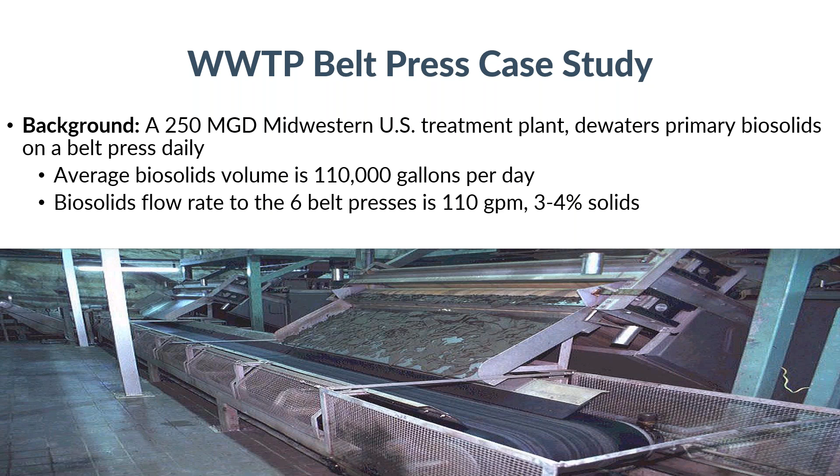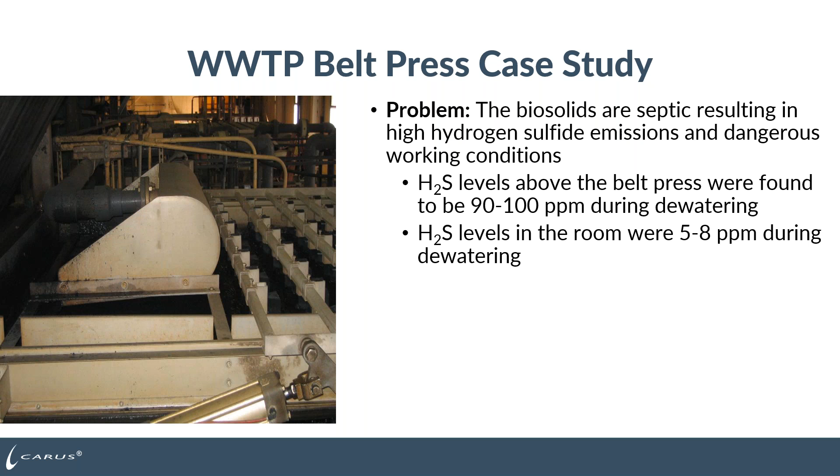So they were getting some complaints. Hydrogen sulfide in the room around the belt presses was 5 to 8 ppm, so below the OSHA standard of 10. But if they walked up onto the platform next to the discharge, where you can see in the picture on the top the sludge coming out of the belt press, it could be as high as 90 to 100 parts per million if you're directly over the top of the belt press. So there were some exposure concerns, and even 5 to 8 ppm was pretty strong in the room itself.

So they chose to use dry permanganate over liquid permanganate for the initial setup. In this case, it was a drum inverter system, so you can see the drum on top of a feeder, and the permanganate was mixed in with water and then went to the injection point on the sludge line going to the belt press. Full scale dosage going into the sludge line was somewhere between 60 and 85 parts per million of permanganate into the 3 to 4% sludge for odor control.

Now this was in the basement of the building, so sludge came from the sludge tanks to the basement. We treated after the sludge pumps, and then the treated sludge went in the pipe upstairs to the 2nd floor. So from the basement it went through the 1st floor, up to the 2nd floor, and then the polymer was added directly before the belt presses. So we had a little bit of contact time before the polymer was added.

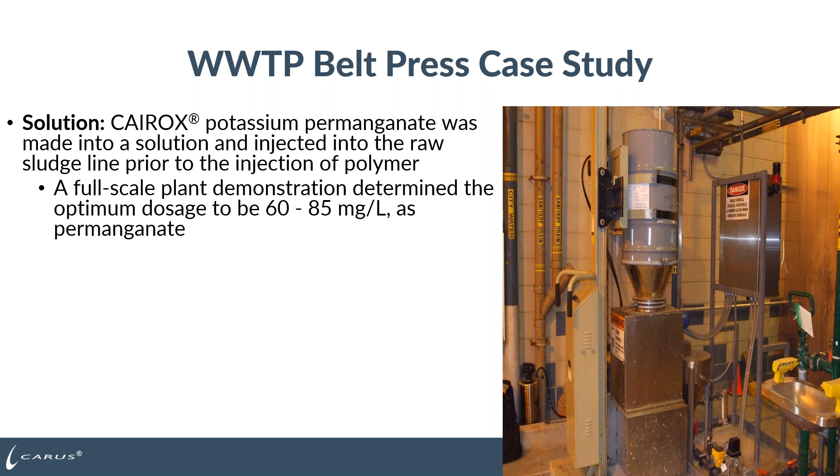As we started treating, the hydrogen sulfide was reduced from that 90 to 100 parts per million that you saw earlier down to less than 2 parts per million, and the hydrogen sulfide in the room to less than 0 parts per million. Now, as we were treating, this was mostly primary biosolids. They kept track of 2 things.

So one of the things we noticed is when we started treating to remove the dissolved sulfide, we were able to turn back their polymer usage from 75 pounds a day per press to 33 pounds per day. And we were still getting good cake solids. We saw an actual cake solid increase of about 2.6% coming off the belt press. So we went from about 24% to about 26% cake solids coming off the belt press.

Typically, you see polymer reduction in cake solids treatment if there's a lot of hydrogen sulfide and it's mostly primary wastewater. Treating that wastewater to remove the dissolved sulfide and getting some permanganate byproduct manganese oxide in typically can sometimes help lower your polymer usage and maybe see some increase.

Long term, they've had the dry system for many, many months, but they had to switch the drums out. They were running water that they were paying for, so we have to make the dry permanganate down into solution to inject it. So what they decided to do long term was move to bulk liquid permanganate. They brought in totes at first and fed from totes directly to the application point, and then eventually moved to a bulk tank and then the same metering pumps to do the application, which just eliminated a lot of operator time. So when you had the dry and the water on the system, you'd have to change it out more often. And when they went to the totes and the liquid bulk tank, they don't have as much maintenance time there.

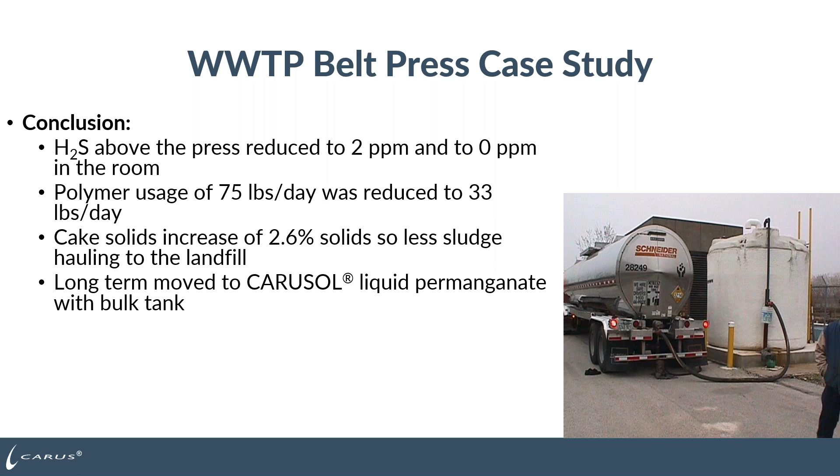So in summary here, locate the sources of odors that you have out there. And once you found out where they're at, can you minimize the detention time? Can you have good housekeeping so that you're not generating that odor? So move that wastewater as quickly as possible. Make sure there's not grease, there's not other biosolids out there in the system, and get those to the finished application point. You do have treatment options.

So out in the collection system or in the plant, if you have immediate odor complaints, you can use CARUSOL liquid permanganate, whether it's 20% or 40%. We've used both in the collection system and at the wastewater treatment plant. In the collection system, if it's long-term odor control, so it's at a lift station and then maybe another lift station or maybe a force main discharge, you've got long detention times, you could use Total Ox, which is the combination of permanganate and nitrate itself.

You can't use the Total Ox in the treatment plant itself because nitrate interferes with your bacteria in your treatment plant, and what you'll end up generating is some nitrogen gas, and you'll get floating sludge in your plant. So Total Ox, 100% out in the collection system only. You can't use that in the treatment plant itself with your clarifiers.

And then there's CAIROX potassium permanganate nuggets, those can be for low odor levels. You have an initial complaint at a lagoon or a clarifier or a lift station, you can go out, spot check those and discharge those and treat for kind of the non-routine odor complaints that you have. And then there's CAIROX potassium permanganate. You can have a dry to liquid feed system in place of the CARUSOL at the treatment plant because you do have those utilities.

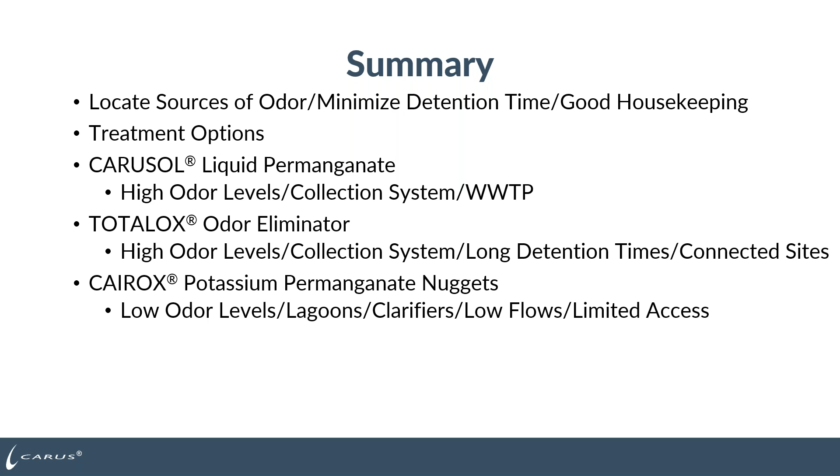We'll look to see what other kind of questions you guys have and answer a few.

Can you use permanganate for a large biosolid sludge tank that has no mixer? So the issue with something like that is you're going to need something to get the permanganate to react. So if it's a large tank and there's no mixer, is there a recirculation pump in it? Is it not odor from the tank itself, but when you move the sludge out of the tank to somewhere else? So if it's like a clarifier or it's a large sludge tank, nuggets would be one thing to try.

You could broadcast the nuggets. Since they're larger and heavier, they will start to sink and you'll get some reaction. It really just depends on how heavy the sludge tank is. So like in a clarifier, you're 0.5%, 1% solids. The nuggets are going to sink pretty rapidly and they'll do that treatment as they sink. If it's a tank where you're 3%, 4% solids, they'll sink, but they won't sink all the way as they react because it's going to take a lot longer for them to sink.

You do need to get some contact between all the solids or sludge in the tank with the permanganate itself. So we've seen ones with no mixers, but they recirc the tank so they can pump the wastewater sludge out and back into the tank, and they'll treat in the recirc loop as a way to kind of treat it.